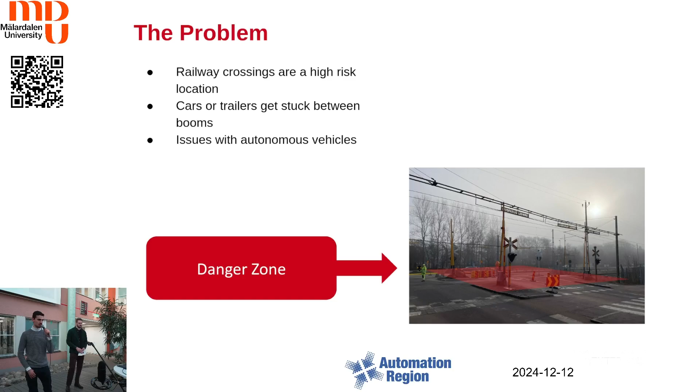The fears I'm talking about today are not just hypothetical. This year, two accidents have happened where trains have collided with trailers stuck between the railway gates. The first one had a lethal outcome. The second one avoided a lethal outcome because the train conductor was aware of what had transpired during the first accident.

The problem is clear. The current safety precautions are insufficient for the safety of both train passengers and traffic participants at the crossing. A new solution is required, one that would be able to detect whether something is between the railway gates and forward that information to the trains so it can stop in time and thus resolve the situation.

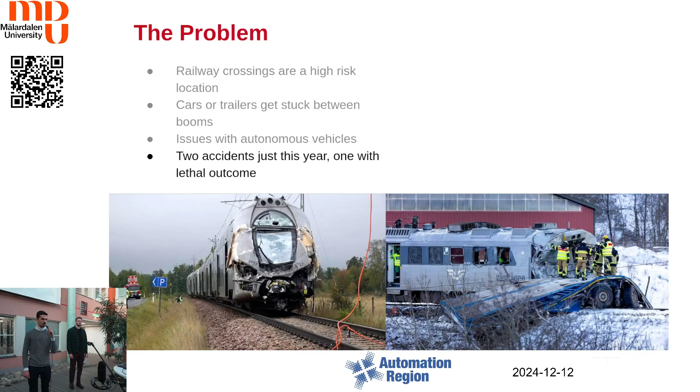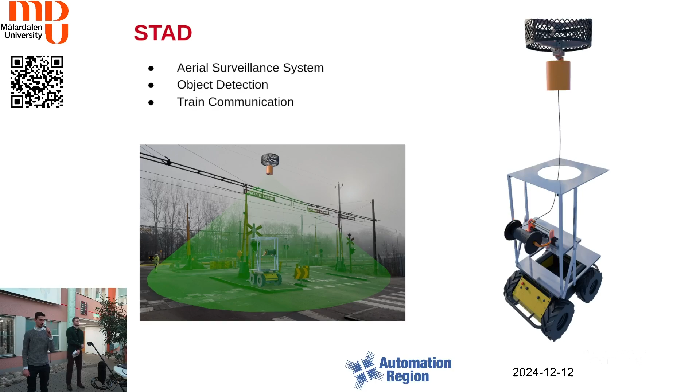So I present our solution: STAD, an autonomous aerial surveillance system, able to use advanced object detection to see whether anything is between the railway gates, and transfer this information to a ground vehicle, which has advanced communication capability, able to forward any information to nearby vehicles and trains, thus solving the situation.

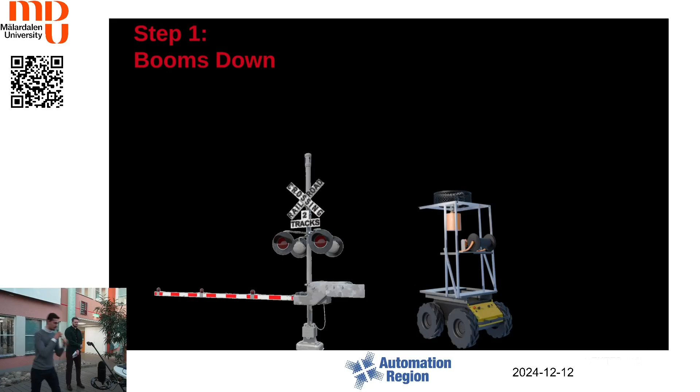Let's go through how the system is envisioned to work. Once the railway gates go down, the drone will deploy. It will rise to an altitude where it's able to surveil the entire crossing and thus detect anything. It will stay in the air for the duration that the booms are down, so that any dangers can be found. If any hazard is found, it will relay the information forward.

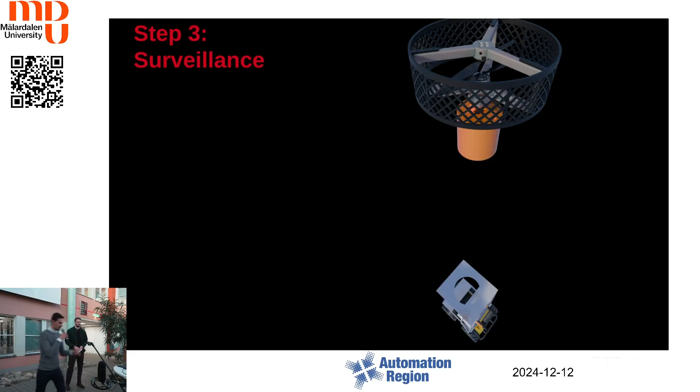Once the danger has passed and the booms go up, we will begin the next step of landing, where the drone will go back down onto the ground vehicle, thus concluding the mission. This pattern will repeat throughout the lifetime of the vehicle.

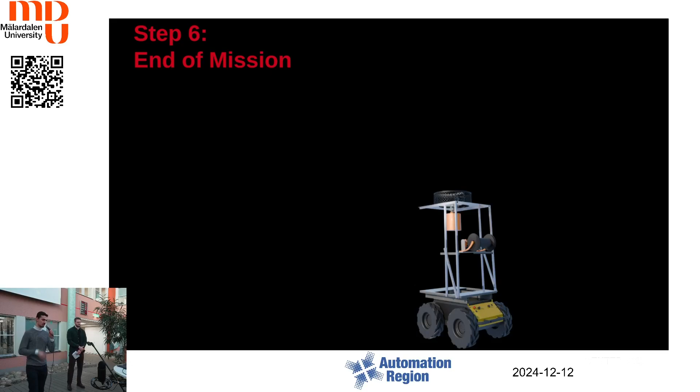This project is a collaboration with two other companies in conjunction with MDU: Volvo Construction Equipment and Alstom. It's a combination of their respective projects. From Volvo, a coaxial drone that is powered through a tether. From Alstom, a ground vehicle able to communicate with trains. By doing a hybrid of these projects, we're able to not only handle real-life problems, but also further the goals of our stakeholders. I will now leave the stage to Victor, who will talk more about the drone and the hardware of our product.

Initially we had a few requirements from our stakeholders. One was long flight duration for the drone. This is because if there's a delay for the train, the drone can finish the mission without having to land and recharge, so it should be able to stay in the air for a long time. Another requirement was that the drone should be tethered. This also helps with the drone's mission time, but it also suits the drone for Swedish flying regulations.

Then the drone has to be able to identify and classify hazards, so we equip the drone with a camera module in order to look down upon the area of interest. We also want to maximize efficiency for the drone, it shouldn't consume too much power when it's running. And the final requirement is that the drone should have wireless communication.

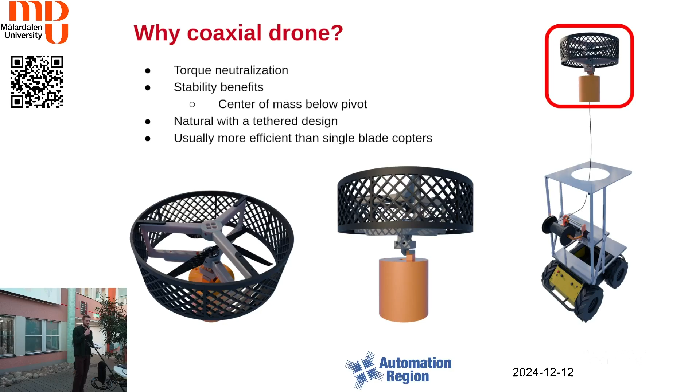So how are we controlling our coaxial drone? It's controlled by tilting the head of the drone in a desired direction. This is done by tilting two servo motors, one in either the X and Y axis.

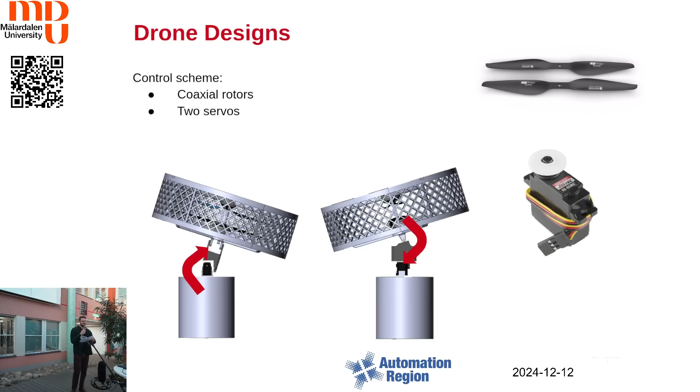Our drone is not the only part of our system. We also have a smart winch. This consists of a spool and a guiding system that guides the cable along the spool.

We have a stepper motor that receives information about the desired height of the drone, and it calculates how much cable it's supposed to give. The final part of the winch system is the landing platform, which the drone comes down and lands upon.

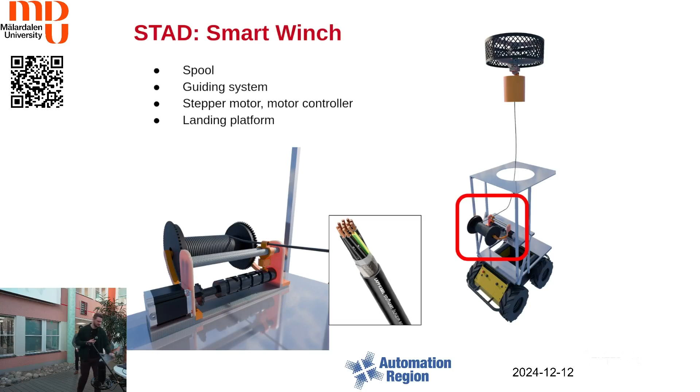Our ground vehicle has two separate power systems: one for driving the PX2, and the other to drive the drone. The ground vehicle performs the bulk of all the computing in the system, along with all the signal processing and classification.

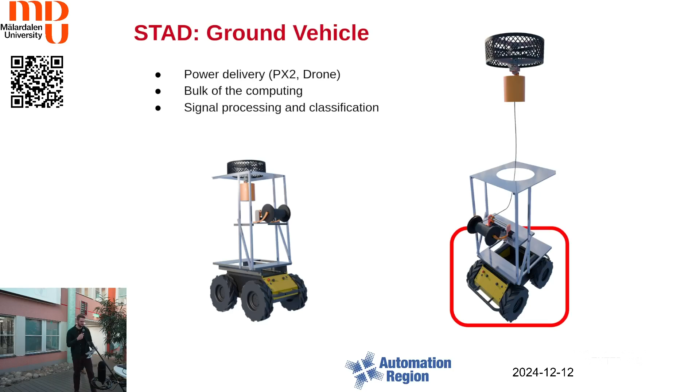Some challenges we met during this process were co-dependencies between the motor dimensioning and increasing the current of the drone, which in turn increased the thickness of the cable, which in turn increased the weight. So we had to decide dimension pretty well.

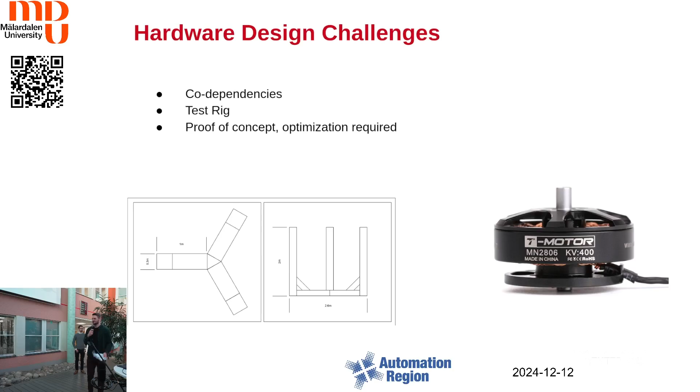Another problem was that we never actually got the equipment required for the test rig, so we were never able to try this drone in a real application, sadly. This is just a proof of concept, so there are a lot of optimizations to be done on the system as a whole. Now I will leave the word to Vakas, a software developer in our team.

Thank you. Coming to the interesting part, our software system is divided into two parts: the drone and the ground vehicle. The drone has a flight controller which has telemetry information about the drone.

For example, where the drone currently is, and then we have a Raspberry Pi with it. The Raspberry Pi takes this information from the flight controller, along with images from the camera modules, and sends it to our ground vehicle.

Our ground vehicle has this computer called PX2. It does its AI and all computation and sends it back to the drone system so the drone can decide how much it has to move and in which direction.

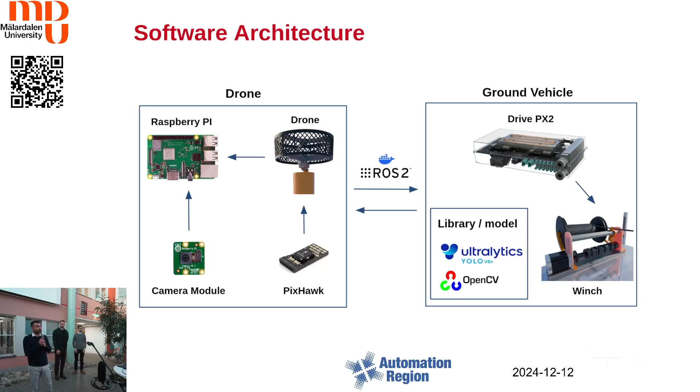For our simulation, we have used Gazebo. It has a world and agents. The agents basically interact with the world. In this environment, you can decide how many motors the drone has, where these motors are situated, and how much thrust these motors produce.

It also works really well with the QGroundControl. It is basically a tool which we can use for configuring the drone remotely. For example, if something goes wrong and we have to configure the drone, we don't have to connect it to a computer. We can just do it remotely.

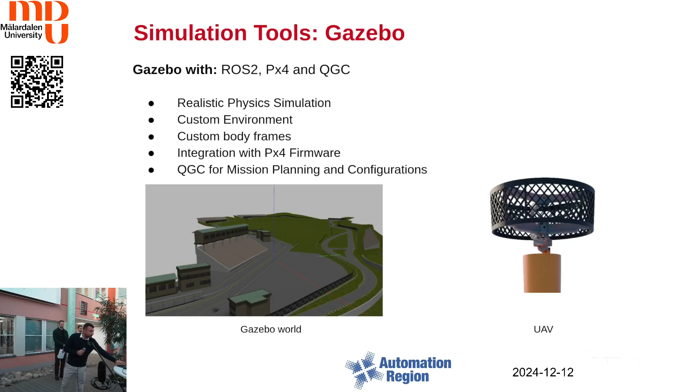So the takeoff system and landing system. The takeoff system is comparatively easier because you don't do a lot of computation. You just provide some PID values and the flight controller takes care of it. But the landing system is a bit tricky.

We are using ArUco markers for it. These are sort of QR codes, but a little bit different. They keep the information of the location. The way our landing system works is our drone takes off, identifies an ArUco marker on the landing pad, calculates its position from the marker, and then we apply a PID controller to it, so it tells us how much action needs to be taken and in which direction.

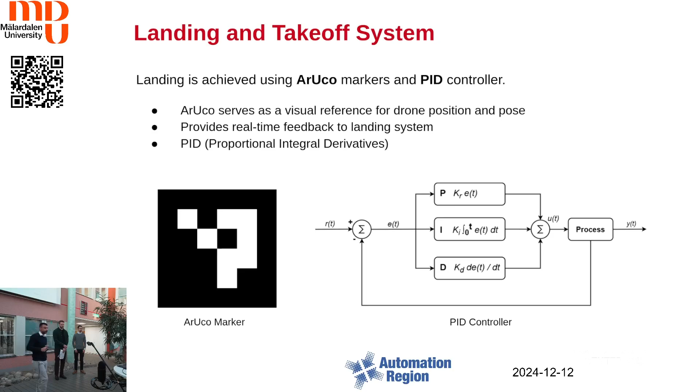Another CPU intensive process is our AI models. The first one we are using is OpenCV for identifying our region of interest, which is the railway crossing area. How we are doing it: we are placing 4 markers around our region of interest, and our OpenCV system finds it and draws a rectangle on it.

Even if one of the markers is missing, we can still predict it by placing 4 markers diagonally of different sizes. We are also using YOLO, a machine learning model, to identify any hazardous objects. In our study, we are just considering animals, people, and vehicles.

The way our system works: if the drone takes off, it identifies an object and also finds its location. If its location overlaps with the location of our region of interest, it generates an alert and sends that alert to a ROS topic, so that alert can later be used by the train systems to take any avoidance actions.

After this, we have a little bit of a demo of our system. I hope you guys can see it.

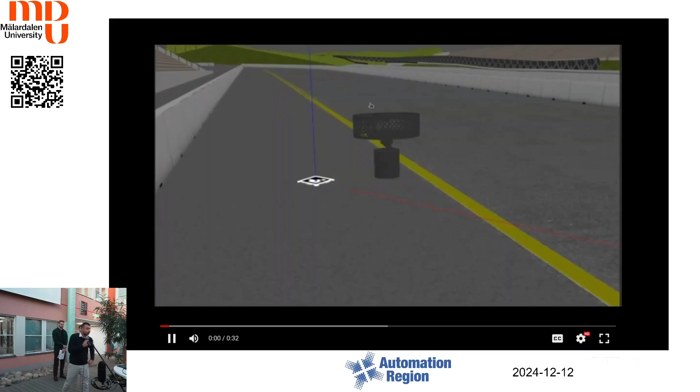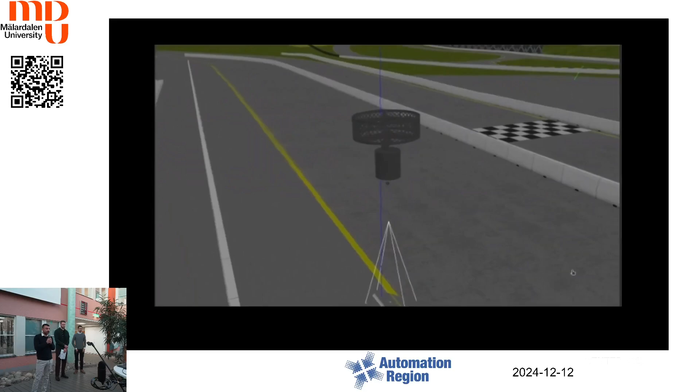The drone takes off. We have fast-forwarded a bit because the landing system is taking up to 45 seconds, but it finds the marker after 45 seconds. Now it has found the marker. Within 10 inches of the marker, it lands. We would like to reduce this time by like 20 seconds, and it is possible, yeah, with given time.

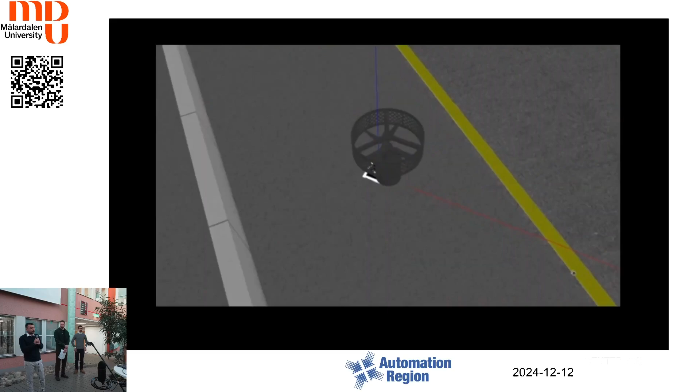So after our simulation, I will hand it to Adrian to talk about the results and our future work. Thank you.

So what have we achieved? Well, we've been able to build the drone as well as the winch, set up both the simulation and software, and integrate it all into one package.

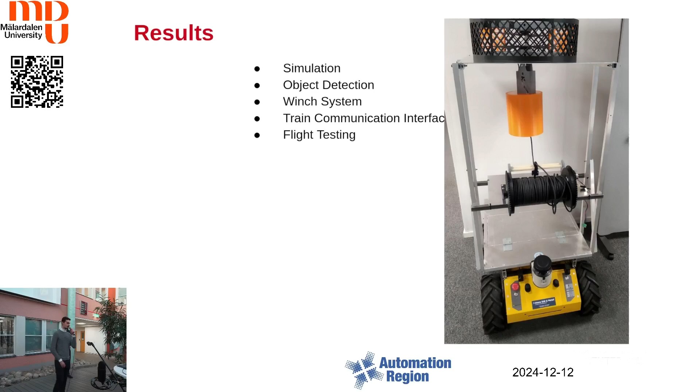However, as mentioned earlier, we were never able to get the test rig, so we were never able to do real-world testing with the drone. Earlier testing shows that the drone has enough power to lift, but we have not been able to test the control itself. That is something we would leave to future work, the next iteration of the project.

For the test rig, as well as to optimize the drone body design. During the design process, we found a lot of optimizations. Specifically, the drone could be made a bit smaller, thus lighter and able to work with smaller motors. Also, the current train communication is made as an interface, as the full communication capability is not developed today. The current system we have is made to be easily integrated when future developments are made.